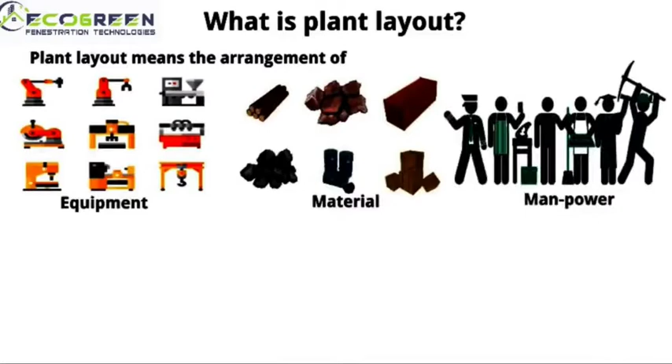What is plant layout? Plant layout means arrangement of equipment, material, manpower and method. Plant layout is a physical arrangement of men, material, machine and method to achieve best efficiency and minimize the overall cost.

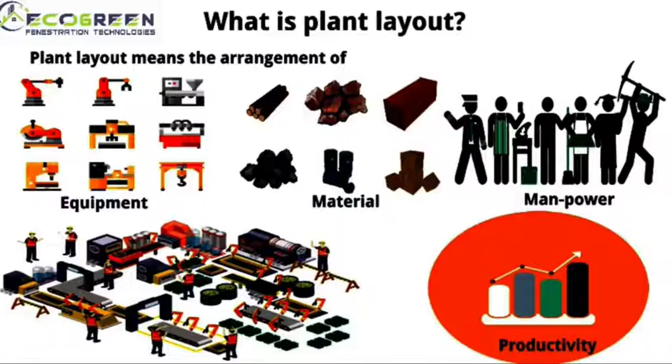Two plants that have similar operations may not have identical layouts due to size of plant, nature of process, and management caliber.

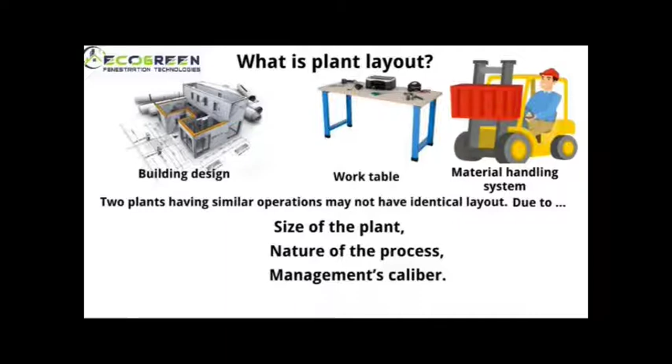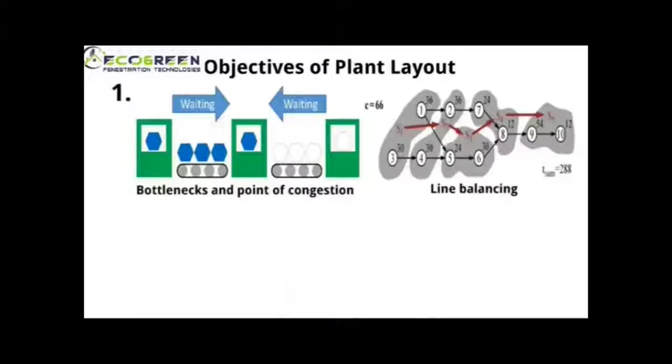First point: the bottlenecks and points of congestion are the main reasons for delay in material handling and transportation. Better plant layout can eliminate the bottlenecks and points of congestion.

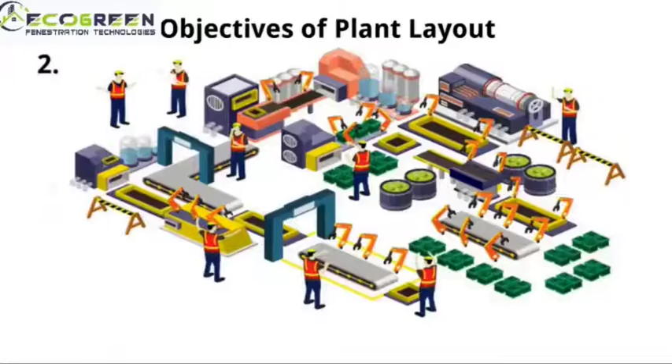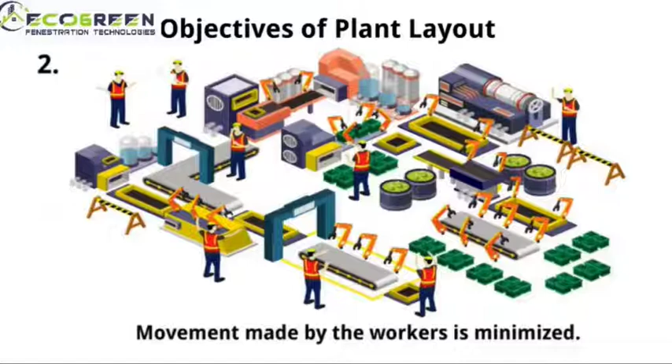Since the plant layout is responsible for an orderly flow of material, productivity and morale of the worker, it is necessary to have a systematically designed layout so that we can reduce the movement. Third point, waiting time of semi-finished product is minimized.

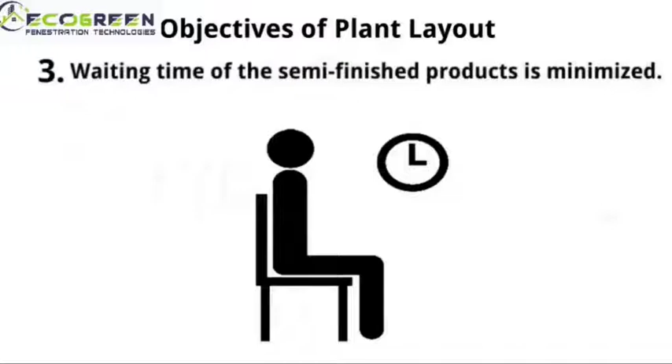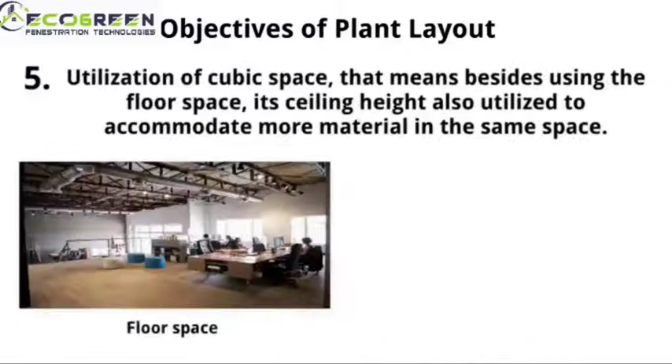Fourth point, increase the flexibility for changes in product design and future modification. Fifth point, utilization of cubic space. That means besides using the floor space, its ceiling height is also utilized to accommodate more material in the same space. For example, we can take mezzanine flooring.

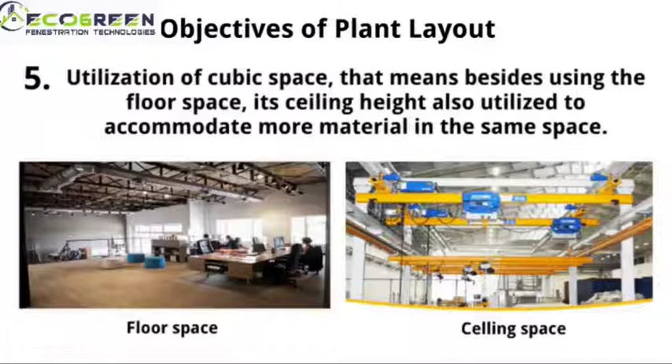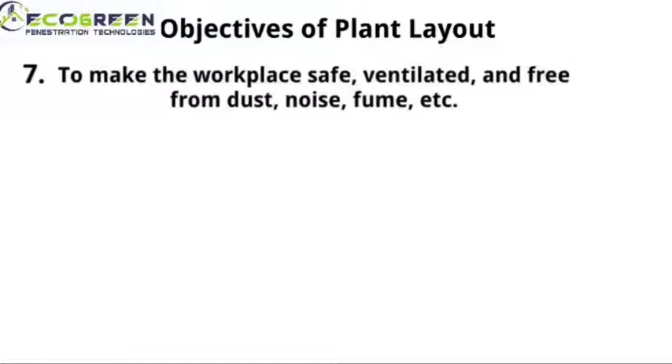Mezzanine flooring is to provide extra storage space that is used for manufacturing, distribution, office space and other expansion of retail space. Sixth point, improved work method and reduced production cycle time. Seventh point, to make the workplace safe, ventilated and free from dust, noise, fumes, etc.

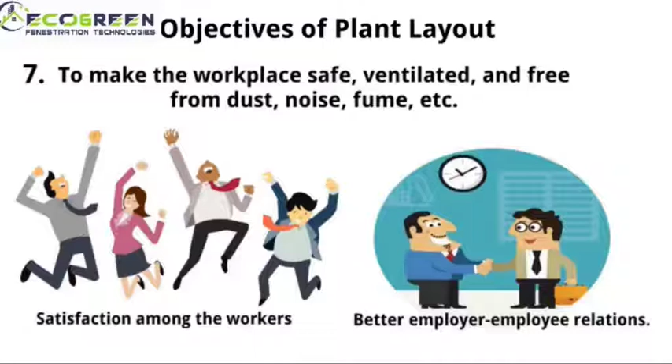With this there is reduction in accidents, and it also increases the morale of workers and creates a good employer-employee relationship. Eighth point, to increase productivity and better product quality with a reduced cost of production.